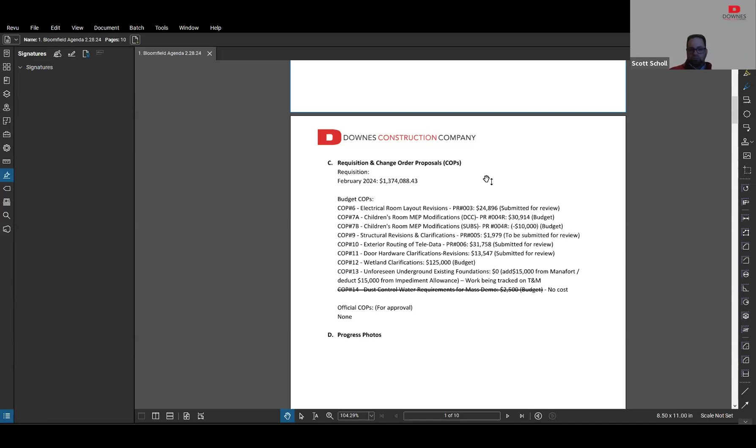You said you added 300 feet of RC. Yeah, I gotta actually, you know, let's even talk about it offline real quick, but I gotta look at the details. There's a whole list of items.

I wanted to get it out there today for everybody's attention, because again, it's not one of those $2,000 change orders. It's a pretty big ticket.

Anthony, I just gave COP number 13, the unforeseen underground existing foundations of the Masonic Temple. I did get hard pricing at the end of the day today. Looked at it with Sean, who was in the field office.

It came in at $8,695 cost. So we are going to take that cost to Manafort and apply it to our impediment allowance of $8,695. The work was all tracked on T&M and signed off by Jason, the site superintendent.

And then COP 14, I have struck out here. There is no cost there. I worked it out with Stanford Wrecking for that additional dust control water and the trucks that they needed to keep the dust control measures down during that mass demo phase.

Thank you. Yes, Bob. A couple questions. Number one, structural revision and clarification. There was some minor revisions to some footing elevations in regards to some rain leaders. So that cost there was, I think, primarily for our MEP consultant to go back in the model and adjust that, and so on and so forth. Right now, I don't believe there was a cost in there for any of our MEP trades at this point in time, nor a cost for our concrete subcontractor to lower those frames.

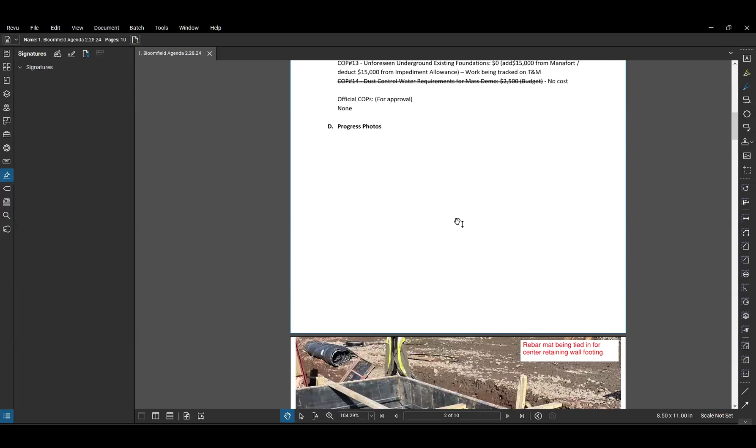Last but not least, the favorite part of the show, progress photos. Hopefully everybody can see here. I'll zoom in the best I can without cutting everything off.

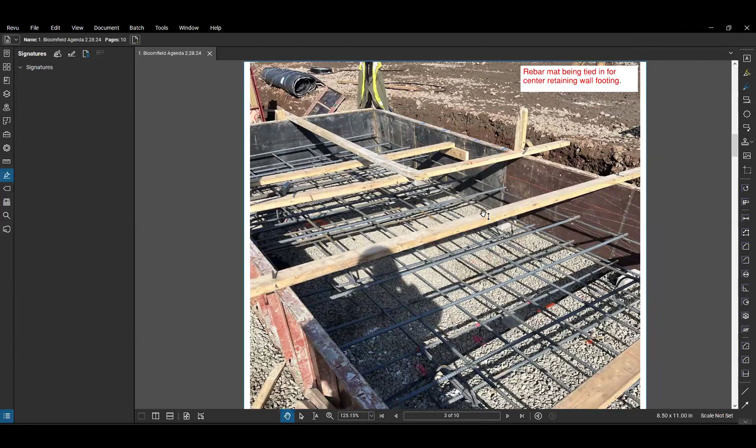This was the start of the retaining wall footing. As you can see here, this was the forms that were set up, as well as rebar going in and being tied for the footing mat.

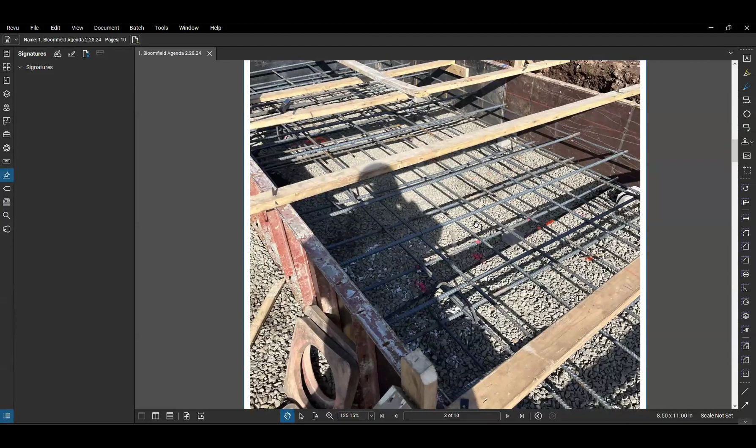Tri-State was on site reviewing all the rebar and temperature. At that point in time, everything was covered to maintain a frost-free condition. Everything went well, everything was signed off, and passed inspection by the building department as well.

As you can see here, we have a bulkhead at this point in time, which is going to stop the concrete pour for the footing at a certain location, to be continued once that concrete cures.

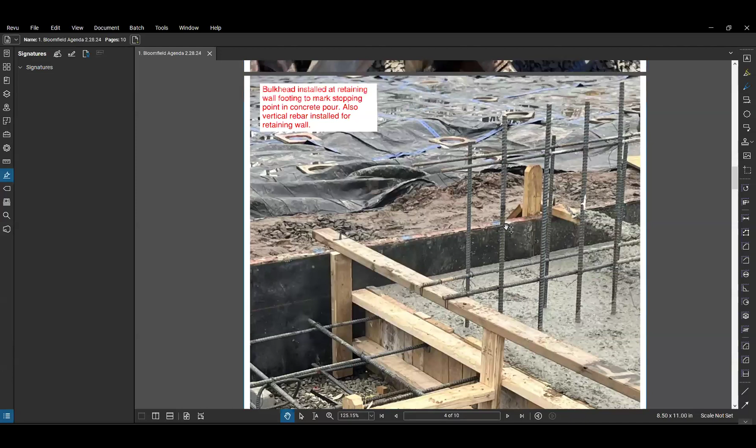As you can see here, we have some rebar above. In the next photo, you'll see all that rebar, for safety concerns, capped with a red cap, to prevent any trip falls or impalement. Impalement especially bad.

As you can see in this one, I tried to take a full shot. The concrete was poured at this point in time. We're starting to cover it, to make sure everything can cure properly with the cold weather coming up.

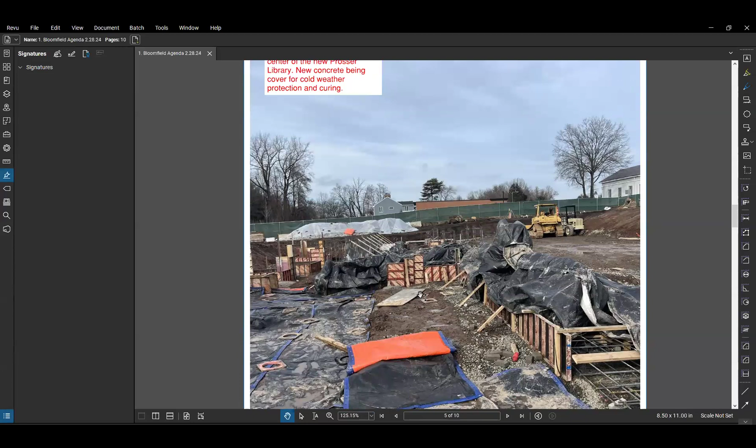That's the whole center footing for the retaining wall. As you can see here on the right-hand side, that's where the structural fill goes up 14 feet from there. Once we create that, I like to call it the pool.

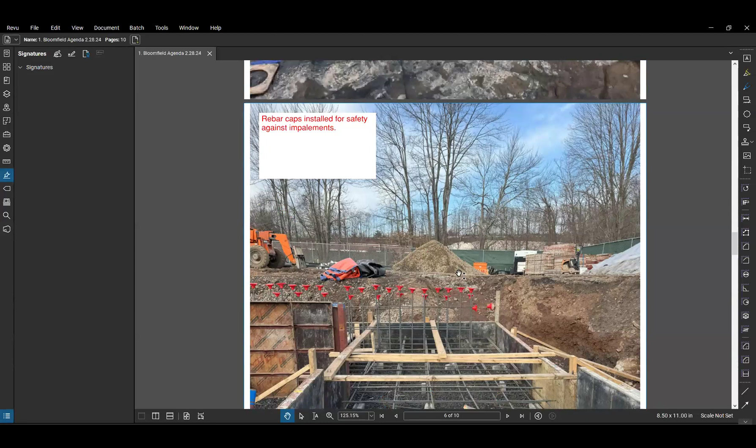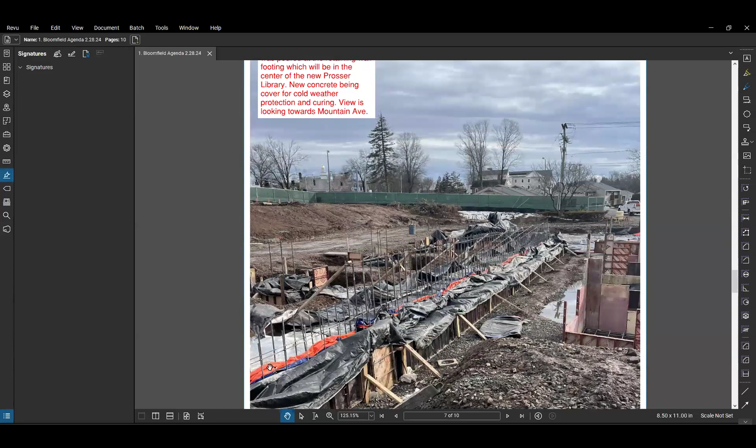You can see the rebar caps have been installed by the end of the day, just for safety against any potential impalements or sticks. Again, we have everything covered as far as cold weather protection, to make sure the curing is up to par and gets done.

In the last couple pages here, you can see all the forms have been stripped off. All the caps have been placed on the rebar going down the line. Those vertical rebars are for once the concrete wall starts to get formed and poured.

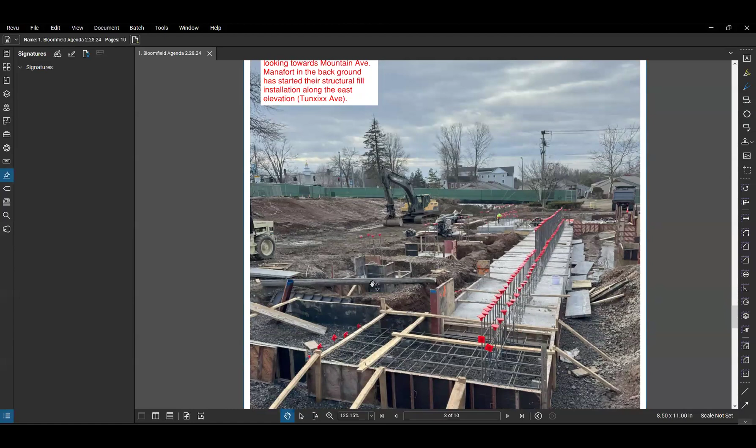Right now, that's the whole center footing for that retaining wall. Again, to the left-hand side, looking towards Mountain Avenue, you have Manafort starting to bring in some of that structural fill of 14 feet that we talked about.

Moving down the list, this is just a closer shot of some piers. This is where some of the structural steel columns are going to go and sit. Again, we have the footing poured.

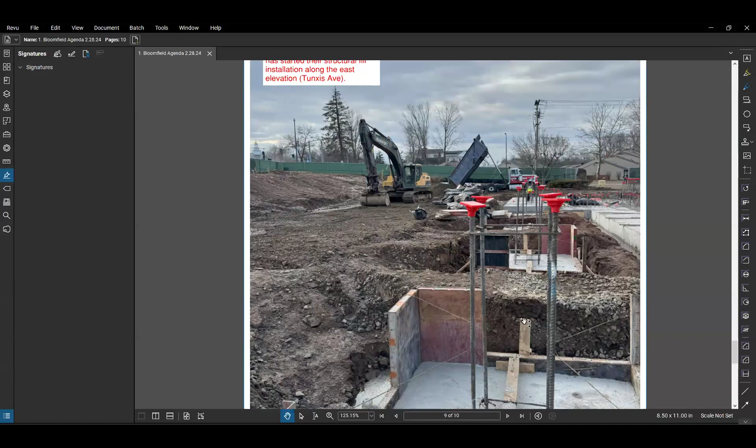At this point in time, we have the vertical sticks of rebar going in. We'll form that up to create the concrete post to sit the steel.

And then we have just a closer view of the footing itself, actually how wide it is and how extensive it is going down the center of the building there. Again, that concrete wall for the retaining wall, I think it's 12 inches thick, and it's going to go up about 14 feet.

If you guys do drive by the site currently, they've started putting the forms up, and they're going to go up higher from where they are right now. But so that's kind of an update. Right now we have structural fill going on to the left, and we have concrete being formed and tied in for rebar and pouring. I guess the exciting times are once concrete is complete and the structural steel starts flying. That's a real big milestone, but there is some work to be done there.

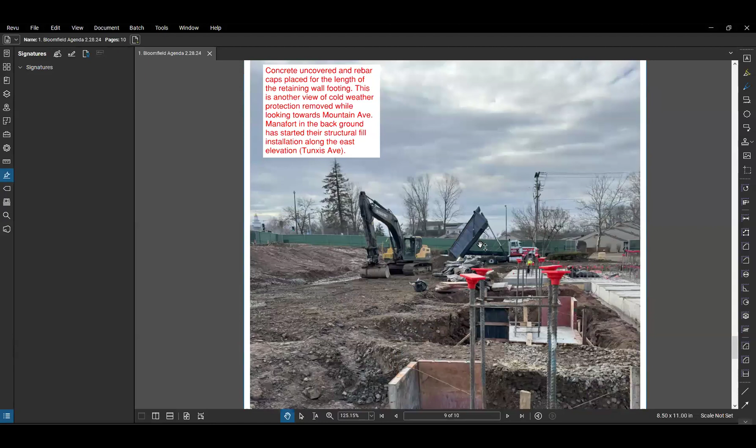Other than that, does anybody have any questions, comments, concerns? Anybody there?

Have you been hindered by any weather? Other than today, nobody was on site doing that. It was pouring pretty good for most of the day. We couldn't do any structural fill or any compaction tests. It was just too wet.

Yeah, but this is New England, and we always have snow and ice and that kind of condition. So have you built into your schedule a certain number of snow days?

No, Richard, we don't predict the weather. I'm sure TSKP doesn't either. No, but you could call the airport and talk to the weather people about the average number of snow days. I don't know that we're looking to increase the cost of time on site for snow days. We really haven't had any snow days. Maybe one. What we've done in the past, Richard, is if we lose a day, sometimes a sub will come to us and ask if they can work Saturday to make up the time, at no cost to the owner.

So what I'm hearing you saying is there've been no delay due to snow. Well, if there was a big huge snow event and everything was down for a week, then we'd be talking, but you haven't experienced that yet. No, not yet. Okay, bite your tongue.

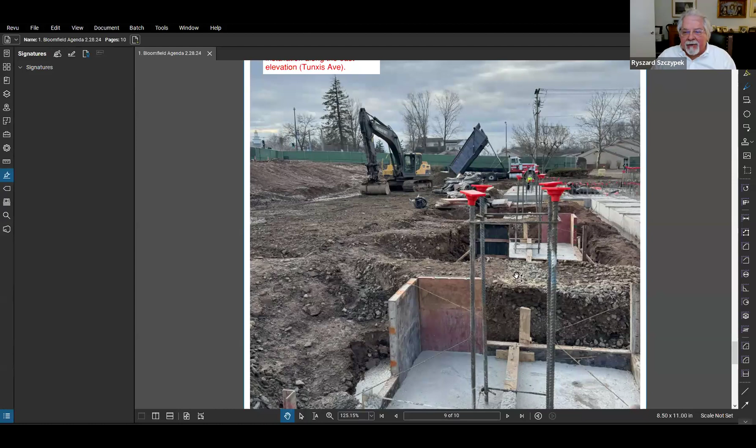Spring is near, thank goodness. Yeah, thank goodness, thank you. Okay, anything else? That's it. I'm all out of here.

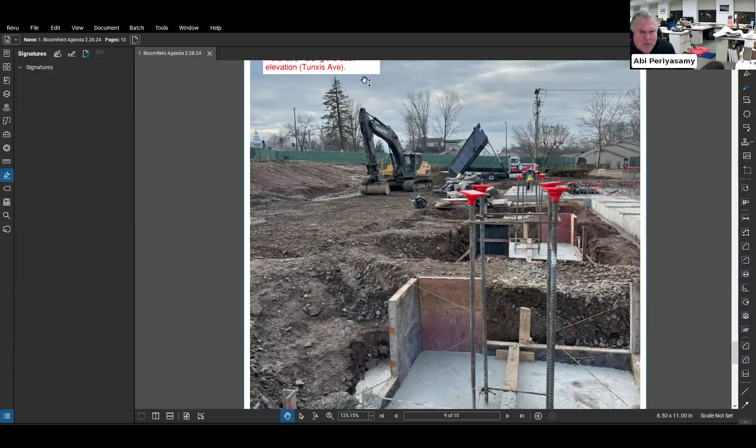So we've had several layouts done, and I know Elizabeth, Allison, Chris, and their entire team have really come together in this short time and pulled everything together. Thank you very much for that. We've had some very intense, long meetings last week, and I think we've nailed down what the final layout needs to be, and we understand how this building is going to function and what kind of services will be offered. Most importantly, the library staff know what this building is going to be and what services will be offered.

There were a few concerns that we have addressed, and I am going to... one second, where's my layout? Okay. So after a lot of discussion and brainstorming and whatnot, we've finally come to the conclusion that what you have in front of you is going to be the best layout for the library.

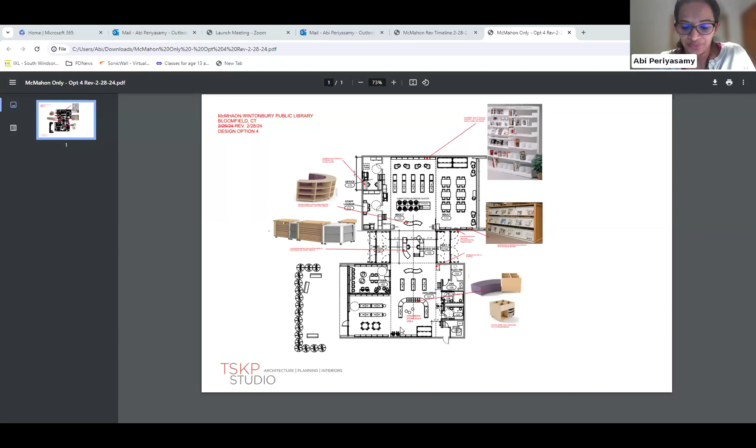What was done is we ended up giving the teens their own little empire, to be separated with some glass walls, and they will have their own little space. There are some tables, chairs, some lounge seating, some computer tables, some bean bags. This is more like a cafe-type seating, so they can look outside. We also were able to accommodate some amount of shelving for the teens, so it becomes their own little private space.

And once we did that, we automatically were able to divide this L-shaped children's space, keeping this area as the middle school age kids section, with some books. This teens room wall, the intention is to have about a 30-inch solid wall, above which will all be glass. So that gives us some space to give a couple of shelving units along this wall, and there will be other mobile units also, along with some seating for the middle school kids.

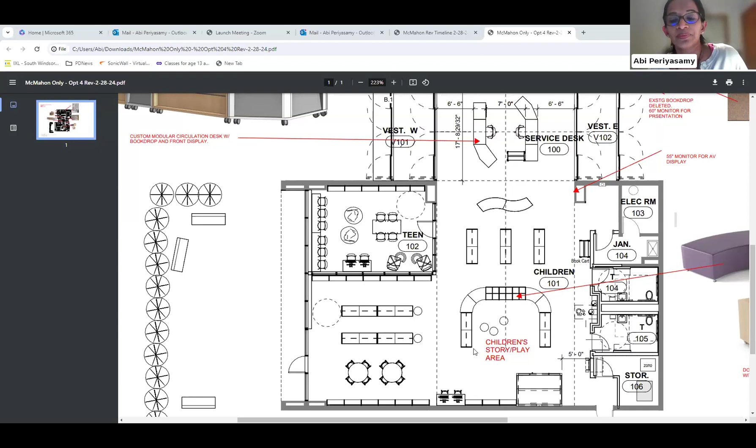Down here, this is mainly the younger kids section. We've tried to separate this space with just some interesting furniture pieces, some low benches, and maybe coupled with a few browser bins or even some mobile shelving units. Now, I know it's in question that this can become just a regular mobile shelving unit, but we'll finalize that soon.

But this sort of gives a little more floor space for either playtime, or these benches can become the librarian's reading seat. And there are also more benches on this side for parents or grandparents to sit while the children can sit on the floor and enjoy more of the open space here. There will be more computers for these kids, and there's going to be shelving along this wall also. Everything else pretty much stays.

Now, we were able to put in a few other mobile shelving units here. This can either be used for this age group, or maybe even the teens collection might spill out here if need be. So it's been decided that this space between the vestibule is going to become the service desk area.

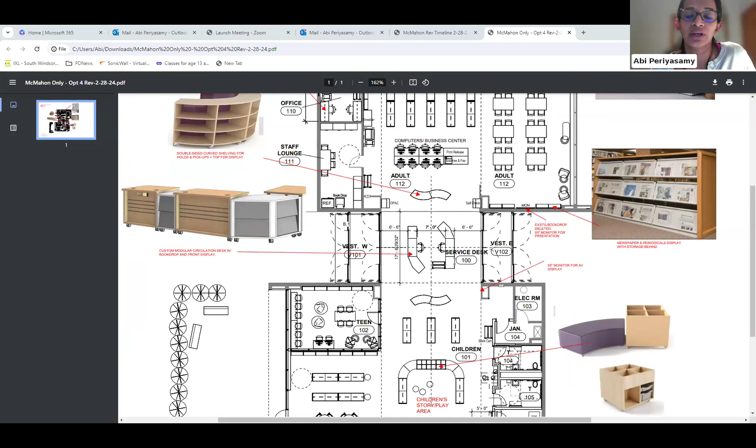Both sides, we have a librarian to welcome the patrons. This particular unit is going to be more of a customized unit, because it was hard for me to find anything already running that would fit the space and the purpose. From this picture, we see there's going to be one proper desk unit for each of the librarians. Out here is a book return unit with a depressible book truck tucked under, and this is a finishing type unit. It will have some display in front on the patron side, and on the back side, bookshelves for holds and pickups. We're showing a book cart here to make sure there's enough space for book carts to move around. This is a similar unit, but since it's not a book return unit, it can just be a storage cabinet, either locking, and it can also have display shelves like this. So there are multiple functions happening in this space with book displays, holds, pickups, and we achieve a lot within this area.

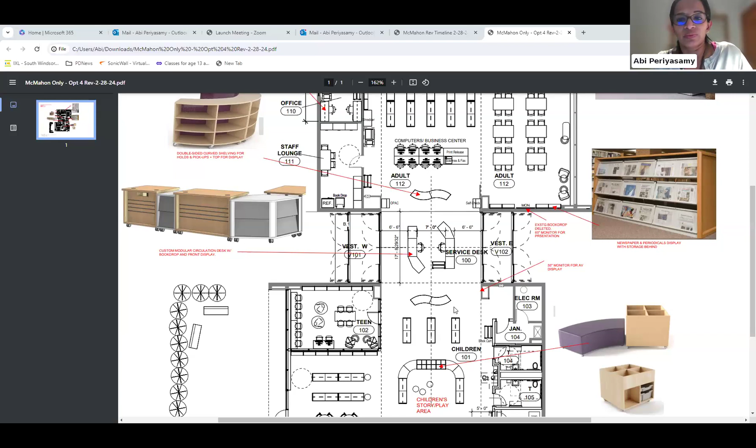At this point, we're trying to move toward getting power and data under the carpet, and we're still researching some products, but it looks like that's going to be the best way to bring the needed infrastructure into this space. Also, Chris is working on trying to make this as wireless as possible, so we don't have to run data wiring everywhere. But along the walls, wherever possible, we will run as much wire molding as possible to get in enough power and data.

So the business center is located within this 14-foot ceiling area, and there's going to be at least 8 computers, plus some other tables for print release, scanner, fax machine, and things like that. Out here on both ends, one will be an OPAC station, which is like a catalog station, and the other side is a self-check station.

There was a question about the self-check being maybe part of the service desk. The problem is the self-check needs to be wheelchair accessible, and we're still working on trying to incorporate that here. If not, it would be here, and the self-check needs to be close enough to the librarian, because from personal experience, I know I'm never able to scan the books correctly, so I always call for the librarian to help. So the proximity of the self-check with the librarian's desk is very important.

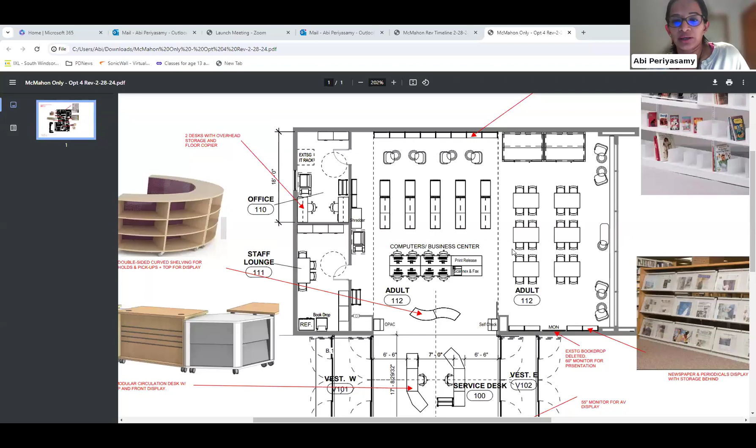There was an existing book drop accessed from the exterior. We discussed this quite a bit, and it was decided that book drop will be eliminated from this project because it wasn't very useful, it was out in the open, and it couldn't function that way. We still kept the other existing book drop that goes into the staff lounge, which was actually more protected, and it seemed like keeping this, along with adding the book return unit into the service area, was plenty for the space. So this will be eliminated.

Instead, what was asked was maybe have a monitor, and I'm showing a 60-inch monitor for when this becomes sort of a community space or a presentation space.

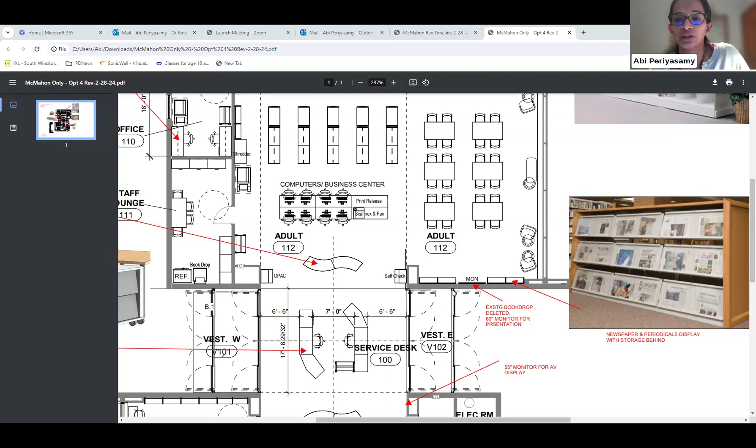This little nook is now going to become a spot for periodicals and newspaper display. We're proposing some sloped display shelves that can be hinged units, so when you lift the shelf, there are still storage shelves underneath. There was a request for that type of storage because they save up to a week's worth of newspapers, and some extra shelves will also accommodate periodicals. We're still discussing what this could be - it can be just regular shelving, or it could be part of the same system.

This back wall of shelving is now going to become a mix of some flat shelves like these at the bottom, and then we're going to have a few sloped display shelves. The idea is that when patrons walk in, they'd be attracted to a nice display wall of new books, library-chosen books, or whatever type of material needs to be displayed. Typically, patrons would walk in, pick up a new book they're interested in, sit, read for some time, or maybe even borrow the book. So having some lounge pieces along with this display seems to serve that purpose.

We had to cut down one of these units, and I'm sorry these graphics aren't coming out well. These are just 3-foot units, and this one should have a line, but it's not showing up. So it used to be 4 units before, now they're just 3, but it gives us a little more extra space for sitting and lounging here.

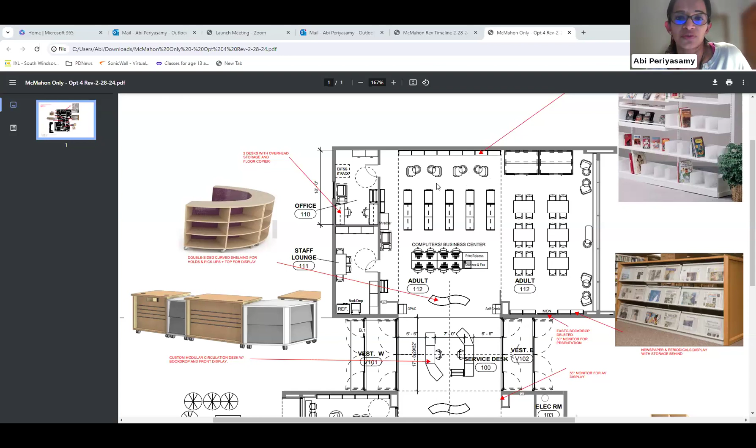The office: it was established that only 2 desks would be needed, but they would need to be more permanent desks. So the plan is to give a proper desk with some storage below, and maybe even some upper cabinets if possible. Just showing a book cart here, because which librarian does not have a book cart near them? And a floor copier was requested in this space.

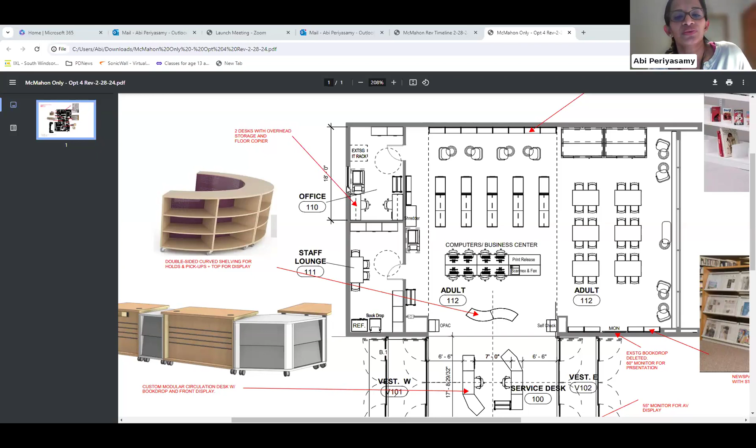Another thing that was requested was a window within the office. We've put one in for now, and some storage cabinets.

No changes made to the staff lounge. We still have a staff lounge to serve 4 people. We'll have new casework coming here, a new depressible book truck to receive all the books that are being returned, and a new refrigerator.

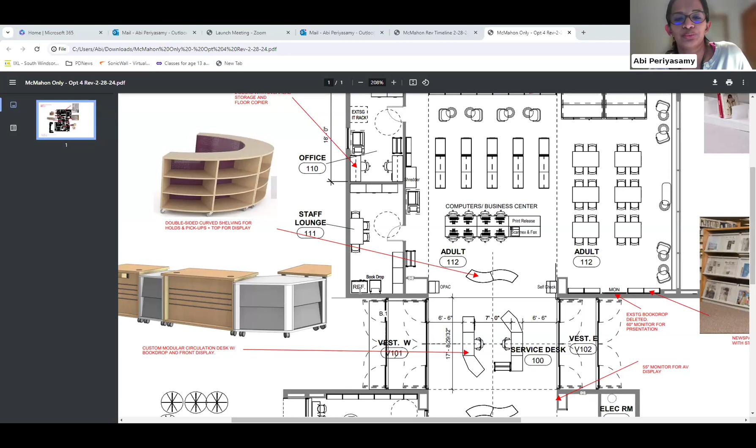And these little curved units on either side, just to bring some fun and interesting pieces into this space and still maintain this symmetry in the design. They look something like this. They're curved and they have at least 3 shelves.

Now, almost all the furniture in this project can be mobile, except the circulation desk pieces, which at this point, the way we are designing it, it's better that they are not on casters. And of course, all the shelving that will be attached to the walls, the privacy pods, they can move, but not very easily.

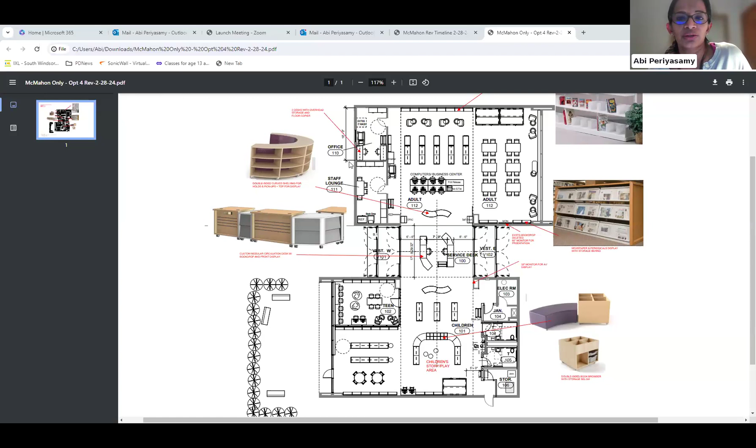Everything else, all the tables will have casters, locking casters, all the freestanding shelving will have locking casters. The benches will have glides, but they are lightweight, they can move, they will not be ganged. Even the computer tables at this point, we are looking to have casters on them also. So this gives a nice functional building with very flexible furniture, and we think this will work well.

Apart from maybe a few last details that need to be covered, the next step for us is to pick the actual pieces for each of these furniture items. I'm already showing you a few here, like this chair, this lounge chair, we need to really bring down those details together. Apart from that, this is pretty much what the new revised McMahon is going to be.

Thank you, Abi. This is great. I guess at this point, let me just open it up to see, does Elizabeth or Allison or Chris want to add any comments before we go to questions? Yes, Vice Chair, thank you.

I wanted to start off by saying thank you so much to Abi, Jeff, Rashard, Jeanette, the TSKP team. Just wow, we had so many issues, the biggest one being that teen space, being with the kids. And I really think that this is a perfect way to incorporate multiple ages so that parents and guardians will feel really good in this space, regardless of what teens are talking about.

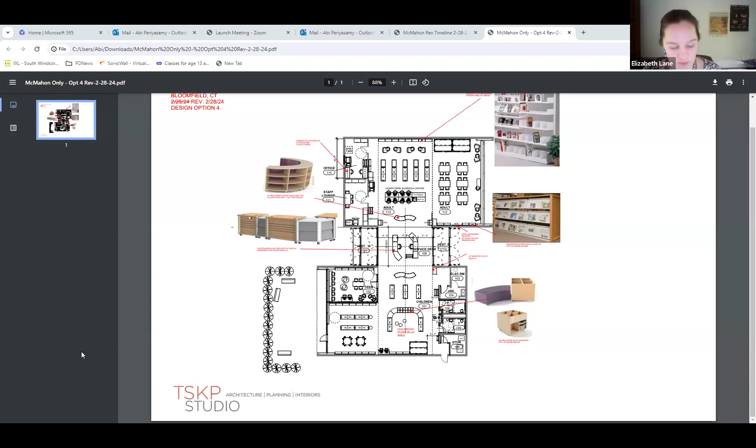Abi, I'm really glad to hear that we have that office window. That's also really important, because otherwise that space is going to feel like you're in a cell, and it's not going to be a good working space for our staff. So I'm excited about seeing how that window looks in real time too.

And then finally, I wanted to talk about the study pods. On this current plan, we have 3 study pods. That was one of the top things we heard from the community when we worked with the consultants about what they wanted — private study spaces and meeting rooms. With the 3,000 square foot reduction in size, we're not going to be able to do that fully.

But we do think that these study pods are going to be a great solution to this. As we move forward, I think we're going to wait to talk about this, but we're going to be soliciting some feedback from the community. One of the big questions is: do we want 3 two-person study pods, or do we want 1 two-person and 1 four-person pod?

Thinking, so we're trying to think through some of that. But I'm really curious to hear about what the rest of the library building committee thinks about this. And again, I just want to say thank you so much to TSKP, because you really delivered in a very short amount of time on so much of our feedback.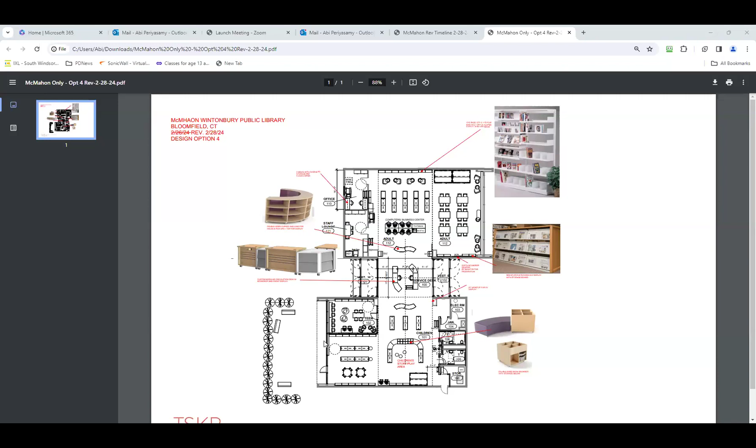Lois? Yes, what do you think the capacity of the building will be in terms of how many people can be in it at once? And just so I have a visual sense, how many kids do you think could fit in the teen area at once—not trying to see if they can get into a tiny little car, but just sitting, working in the teen area. That will give me a visual sense of what we're looking at.

Well, every one of these seats can be occupied, so we have 6, 7, 8, 9, 10, 14, 15, 16 kids in here at one point. 16. Yeah, good, I wouldn't go more than that.

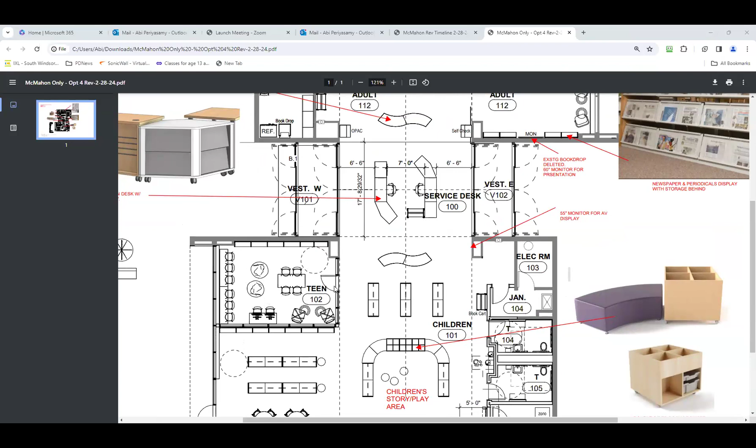How about the facility as a whole, including the librarians? I'm just talking about human beings in the space—occupancy. Yeah, better word, occupancy. Well, that's one thing on my list, and I'm sure Ryszard was about to speak up.

I've got to look at that code sheet. We had the addition code sheet done, and now have to amend that for this, so I've got to look at that. That's probably on my list of things to do, to figure out what the maximum occupancy is based on that square footage and based on the means of egress.

So I'll have to get back to you on that, if that's a correct statement, Ryszard. What you're talking about is the code permitted occupancy - that's one figure the building official will look at to make sure we have proper egress for that occupant load. But I think the question is really how many can comfortably be in the building and do what they need to do.

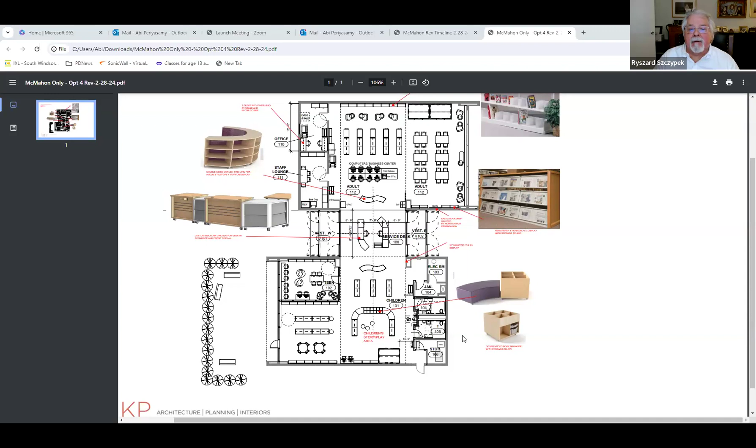And then we have the others as well - the middle school kids. Help me with that, Abby.

So for the middle school kids, typically I would count the number of seats to be the maximum number of people that can comfortably be in that space. Here we have about 8 chairs, and I'm showing a couple of ottomans, so about 10 kids can be comfortably working in this space, along with 2 more here at the computers. Whether this is for middle school or the younger kids, we can for now count this to be middle school. So that's 12.

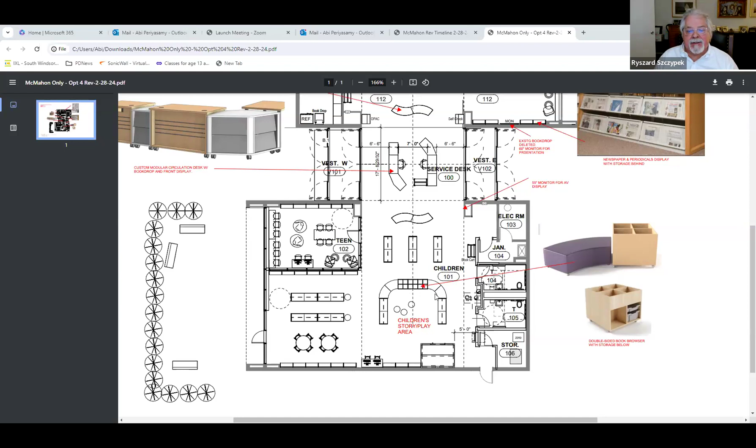I guess I would like to ask Elizabeth, I know this building is smaller than we had hoped, but given that number of possibilities, assuming they break down in those ways, can you do what you have to do? This building is not big enough to do everything we need to do. That being said, that's why I want to go spend time over there and try to figure out these numbers and really think it through and get a feel for the space.

Folding chairs on a folding cart? Chairs, thank you, yes. And that cart has about 30 chairs on it. So on a typical day, it seems like 100 people could be accommodated there, including the librarians. And since people don't usually stay all day, that means a variety of people could be there.

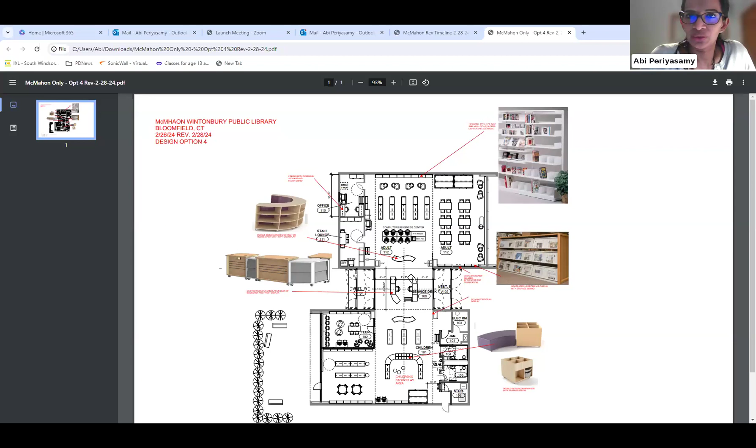Okay, I am going to bring up the schedule that was next on the list. Okay, could I, before we do that, just ask if there are any other questions or comments on this?

I'm trying to wrap my head around where the building committee would come in to deal with minute details like this, like what's going to be placed where within the building, because we're not doing that to a large extent at Foster, as I understand. Why would we be doing it at McMahon? I would think that would be something that the staff with TSKP would do, and that's fine.

You are correct, Bob. You are relying on staff. Other than questioning some of the things in terms of cost, I'm not sure the building committee really wants to get into that kind of detail. No, I don't think so. Informational, yes, it's just important for us to have it. That's really what we're looking at when she shows us the calendar.

Right. I mean, we don't have to approve the FF&E, Nancy, do we? No, but you'll have to approve the purchase, the amount of the purchase when we do it. And that's what I was trying to get to — does that have to be finalized yet?

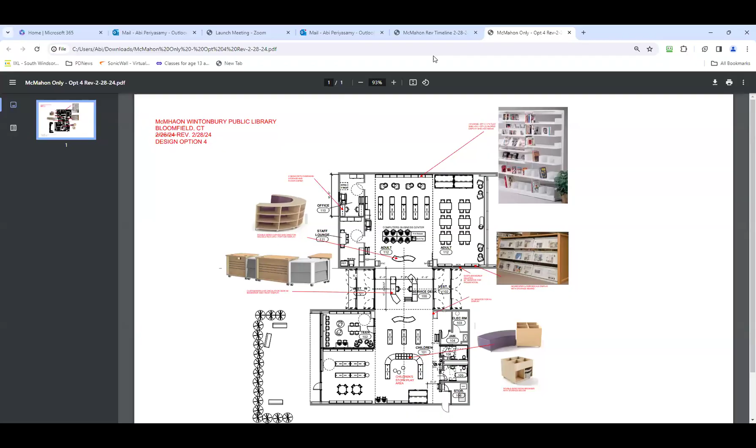She's going to show us the schedule. Is that what you're going to show us now, Abby? Yes. Okay, perfect. Thank you.

But I agree with you, Bob. I think it's up to Elizabeth and her team to make those decisions on what they need and want. Yeah, our concern is cost. Right, cost.

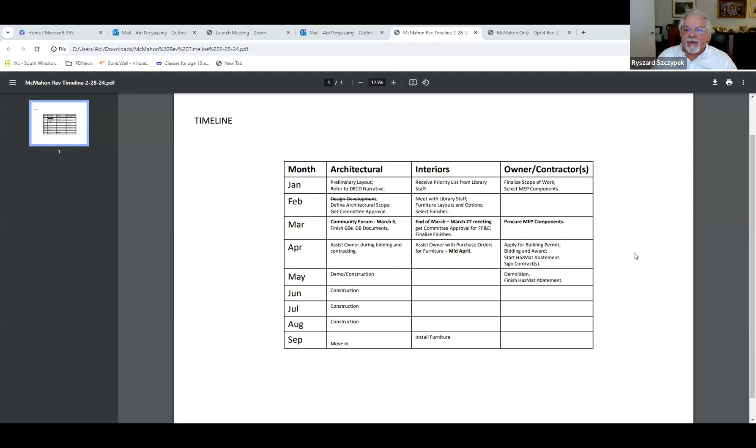Okay, great, Abby. I'd like to make some comments on this schedule. Can you enlarge this a little bit? All right, you've seen a timeline that we presented at the last meeting. We've made some edits to it. You can see that we drew a line through some of the items and added some text in bold.

First, if you look in February, we have previously talked about when we initially were brought in to discuss the project at McMahon — we really thought about it in the traditional way, where we would have a preliminary layout, then design development, then CDs or construction documents, as you can see here in March. We drew lines through design development and through CDs, because the approach on this project, based on my understanding, is that we're doing a design-build set of documents that Glenn can use to get proposals from vendors, subcontractors, and so on.

So what we need to do in March is have a set of design-build documents so that Glenn can get proposals from subcontractors, which will probably happen in April. I say 'assist owner during bidding and contracting,' but really it would be proposals that Glenn gets, and then he'd be able to compile fixed numbers from those vendors.

In April also, we would be asking the owner to release purchase orders for furniture. You've seen a hint at what Abby has conceived for this space, but we'd need to ask Abby to get budgets for the furniture and maybe better pictures and unit prices. By April we'd need to get released to put out purchase orders, and Abby, I'm hoping we have enough time to get these items for occupancy and installation in September, as you can see in this timeline.

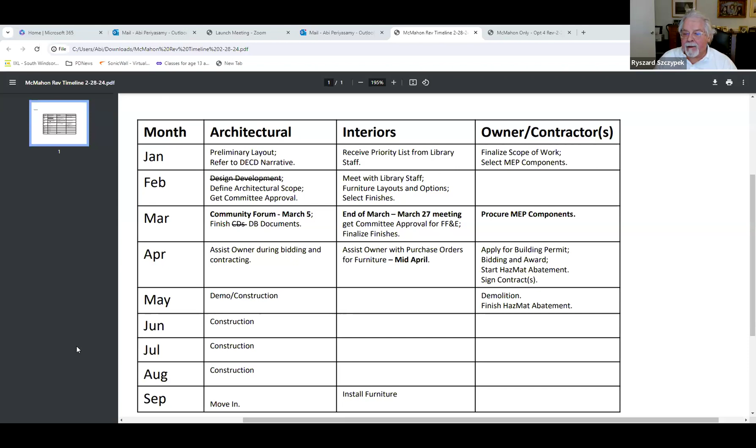Abi, can we stop sharing? No, can we go back to the motion? So we have a motion, it was seconded, we're having discussion.

Before I request a vote on that, can we just go, and I say again, what exactly would you do with this motion, Jeff, if we approve it? What are you gonna move forward with providing?

Well, what I'm going to do is I'm going to take that layout that Abi has worked out with the library staff, and I've already started to find some systems to gather together, hoping that nothing is going to change. I know the ADA toilet, that whole wall envelope area is not going to change. And I got a glass system for the teen room, that's the only really new item. And then the storefronts.

So if I can convince everybody that the building components, the frame for Abi's work, the interior stuff is set, then I can work with Glenn. We can meet at the site, we can walk through everything in the drawings that I provide him, talk about what we're thinking, what potentially is there, and then he can start to take it and get all his bids.

Because if we start having to shift and change and stuff during that, that's when it gets a little scary for me. So I'd just like to have that sort of an okay that the teen room as it is there with the vestibules, the ADA toilets, everything that's good. Then I can finish my drawings and get them to Glenn.

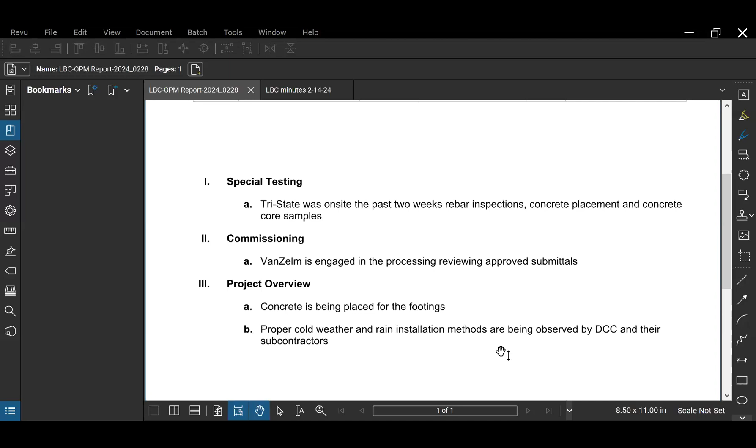Okay, next up is the banners provided by the Friends. So Elizabeth, I think you're up for that one. Yes, thank you, hold on, let me cue that up.